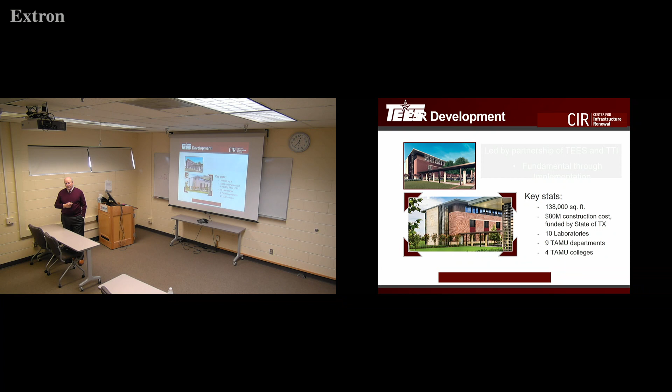I'm not showing this, but next door is the TTI Building, which has kind of changed its mode of operation since this laboratory has been built. This is under the College of Engineering, and the TTI group is now under that. So that's kind of a reversal of roles. It's really changed things a lot for people. But the items here are just ideas that we have of how we can collaborate with others. And there's several on campus that have moved into the building that we hadn't previously associated with. And so there's a lot of interesting changes happening. And I have now 3 offices.

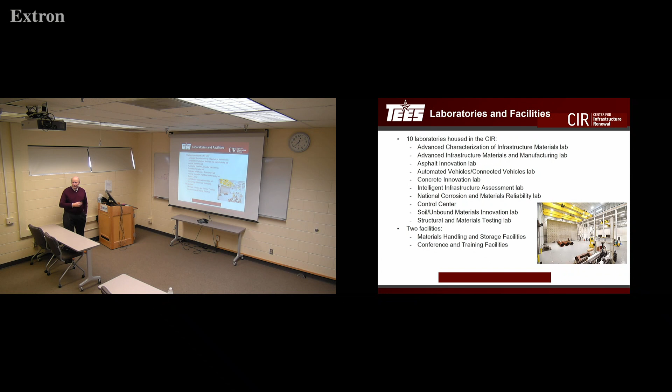And I have to visit them periodically to just see what's going on there. But anyway, yeah, a lot of exciting changes there for us in this regard. So yeah, we'd love to have you come and visit with us and talk about what the opportunities are.

For concrete pavements, concrete pavement technology has changed a lot as well. But these are generally the types that we deal with: jointed plain, continuously reinforced, and roller compacted is probably the newest one there. It's an old idea, but interestingly, it's being pushed into the urban environment for use.

And the thing that's interesting about all these types, I think, is that they all have different behavior characteristics. And I think we need to understand them. And not everybody does, especially in the general engineering community. I'm kind of a proponent that we should have a separate license for pavement engineering. I mean, how many litigation cases do you need to justify that maybe there ought to be a license for this?

That's an idea that we could probably talk about and bounce around, but it's kind of my opinion that the most sustainable version out here is actually a precast slab. You might wonder why I say that, but it has a lot of potential, and I think we're just beginning to realize some of the benefits of precast paving. But the mechanisms are different, and the way they perform ends up being different in a lot of cases.

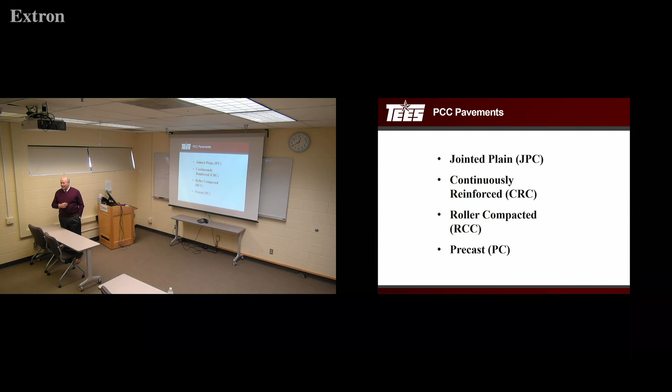And sustainability is a really important aspect here. And believe me, I'm a proponent for concrete pavements, but there are some options here that are just simply not a good choice. And I don't say that to the industry very much because they don't like to hear me say that, but I think it's true.

So what we're about is understanding how long our structures are going to last, right? This is the perennial question that's been there for years, and I don't know if we still have a good handle on it. But owners want to know, how long is it going to last? How's the new surface going to work in the climate? How's it going to behave under loads? Can we predict how long it will go? How much life? What's the cost going to be? These are very pertinent questions.

I work with a group now of pavement managers. They do truck terminals. And if you've been to a truck terminal and seen the things that go on, it's horrendous. It's phenomenal, the amount of money and the decisions they make, and I just don't think they have the tools yet. So on the academic side of things, there's a lot of work here, a lot of opportunity for us still, and it's about these characteristics.

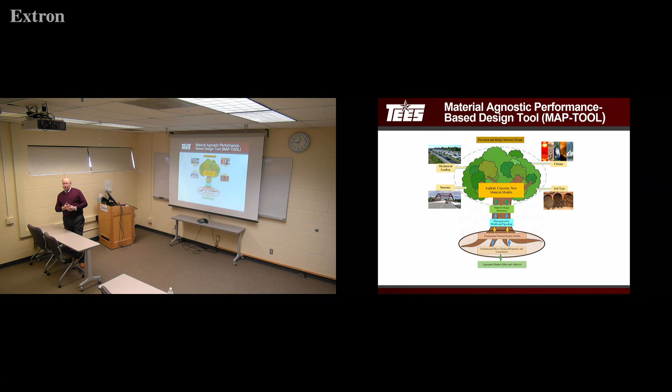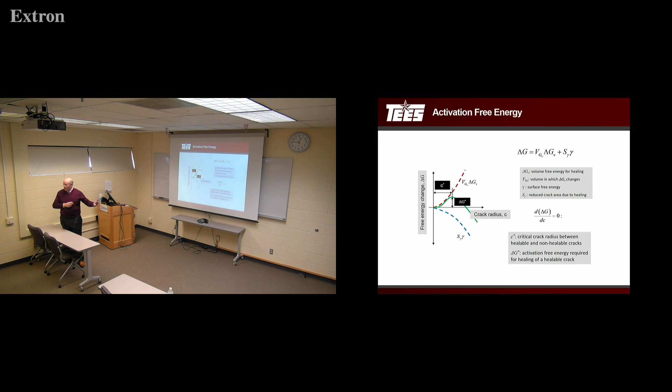This is an interesting idea, and I'll come back to it, but this is just one type of model that might work. And I'm talking about interfaces today, so I'm talking about how things bond, right? How they stick together, how they come apart. They may be different material types, they may be the same material. But this is an energy-based approach, and I'm not going to elaborate on it because I'm just kind of learning about it myself. But the idea of understanding the potential energies and the kinds of energies that are there to affect crack growth or what have you is what we think is a common ground, if you will, to try to unify the approaches that we take for looking at how pavements perform.

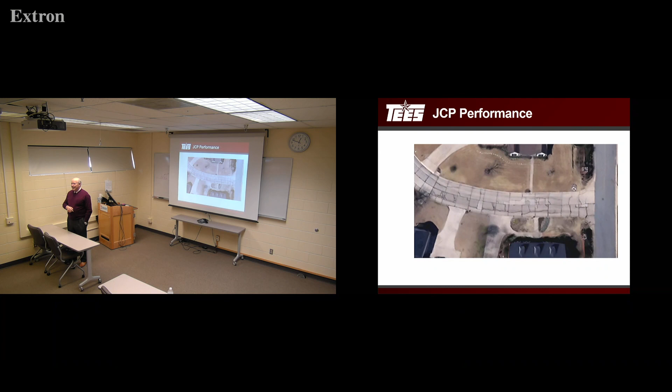So we need to up our game here a little bit. I think understanding the erosion process, and Dr. Dempsey did work on this years ago, and it's still relevant, by the way. That's another one of those things that needs to be brought out. But here it is.

Now, one thing that I've noticed is a concrete slab tends to end up unsupported around the edges and corners. It's a warping type behavior. I don't think we've realized as much as we need to how persistent this is. It's all over. It depends on what part of the country you're in, but California is notorious for this.

Now, what's interesting about this situation, the temperature cycle that we see hardly ever causes that slab to come in contact with the base, hardly ever. And it's so much that it's just a springboard. So yeah, we're gonna get pumping. We're gonna get this hydraulic effect taking place.

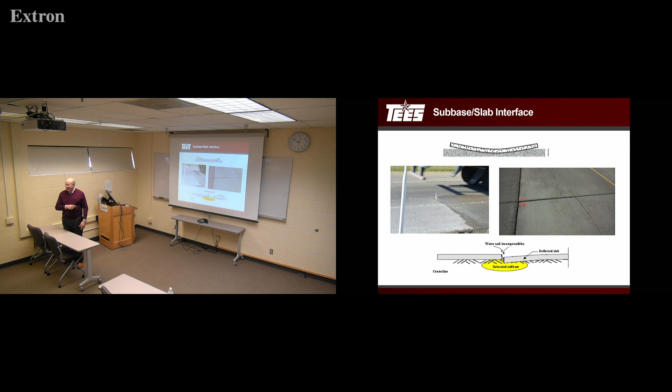Now this is why I think precast has such a great perspective about it. It's from the evidence I've seen, talking to people and asking about how these projects are doing. Even with unsealed joints, they seem to be working. It's amazing, I think, the effect this has. So how do we do it? How do we get them flat? What's the answer to that? Kind of an interesting thing.

Now, I've done some work in Texas over the years, and these are some cores that we took. And look right here, there's a nice little void, and I ran into this in my PhD work, same thing. And the interesting thing here, look, there's the slab, and there's the interface between the base and the lime-treated layer. And that's where the voiding is. This is just fascinating to me to think about what is happening.

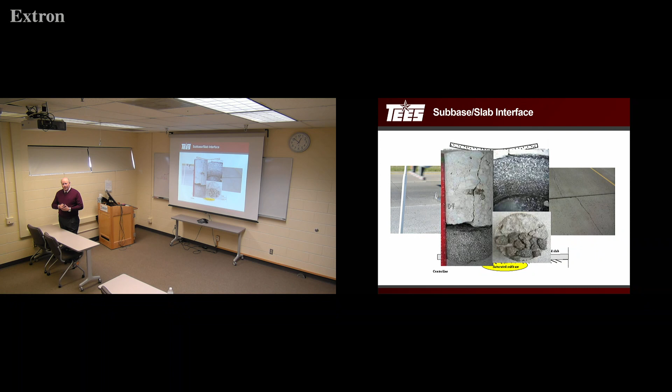But these little granules were pumped into this interface and started to wear that out too. I mean, it's a double whammy after a while. And it's a tough problem here, I think, that we're seeing. Now, again, I've been really interested in curing concrete because I think it's got everything to do with this, but I hadn't proved it per se.

So I worked with the state of Florida for the last several years. They're going to do a test road, by the way, a concrete pavement test road, on route US 301. It's north of Gainesville going to Jacksonville, on that kind of a back road up there. But I worked on the calibration. They wanted to calibrate the Pavement ME, so I was trying to work on that.

And the thing that was interesting, and I could talk forever about this, but we had 13 sites, right? We started plotting the cracking and damage relations. They're all over the place, literally all over the place. There was no consistency from one site to the next. And I'm thinking, okay, so how are we going to calibrate that? What do you use there? What's that identifying commonality? It just wasn't there.

And so I started looking deeper, and it was a little rough, but I tried to back out what I thought represented the set of the slab. And it just became evident that it was different from site to site. It wasn't the same. And Pavement ME has a thing in the program where you can change the set. It's minus 10 degrees. They tell you not to touch it. Not supposed to play with that.

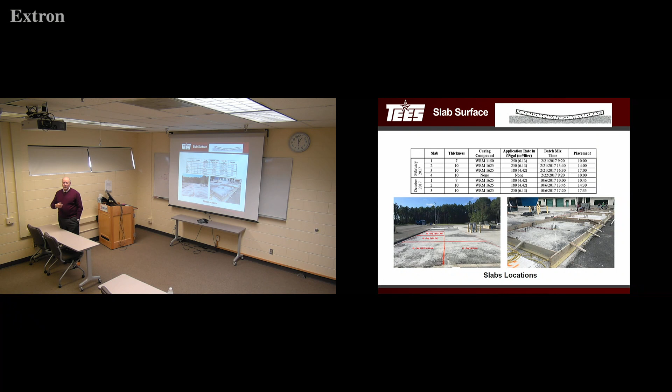And it was still lousy. But I knew how much we put down, because we weighed it, you know, and so we have an idea. But this is really critical, uniformity. And most of the time we don't have it. And if we don't have uniformity, then you don't know what you have. And the effects are enormous, as it turns out. Anyway, so one interface between the slab and the environment. That's an interface where there's more to be done.

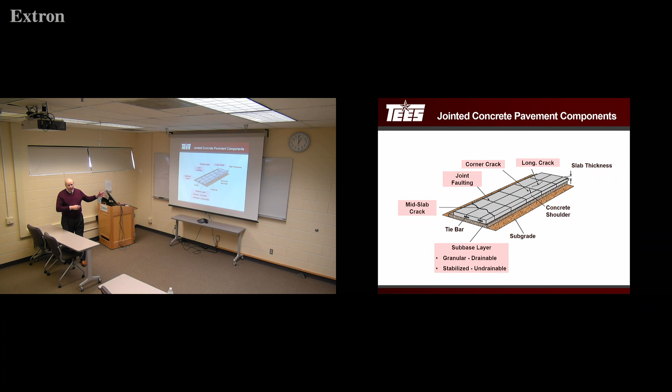Okay. Here's another one. And I mentioned this one because we have to have this done in such a way that we get enough energy to crack those things, right? Now this is a top-down crack. That's a bottom-up crack. So it's kind of odd how they're working against each other. Now, Pavement ME does top-down cracking, right? I learned about Pavement ME, and my impression is if you get a top-down crack, you shouldn't do that design. It's not a good idea. But enough said about that.

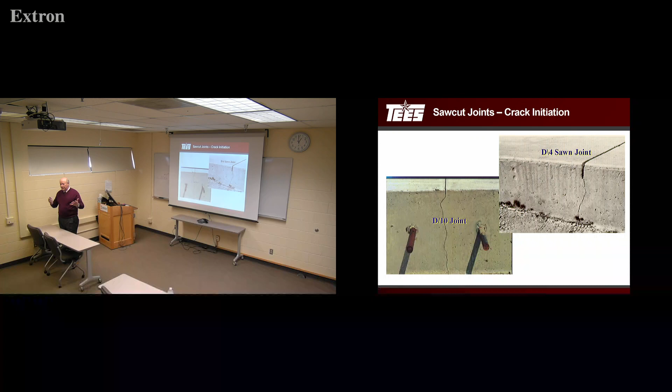But so another interface, getting enough energy to get that to break early. And if we don't, guess what happens? We get cracks other places that are wider. And we know that's not going to work either. So timing, saw cutting, that's an interface.

Here's another interesting one. When the concrete is setting, we've got hydration, drying shrinkage, moisture, thermal conductivity, thermal expansion, creep strains, strength. We got all that stuff going on. They're all interactive. What do we do in Pavement ME right now? We skip it, right? We start at 28 days, okay? So we're not even representing this yet. And wouldn't this make a difference? If we understand the history of how the hydration products form, how the porosity forms, how the drying shrinkage forms, I think this is all kind of important.

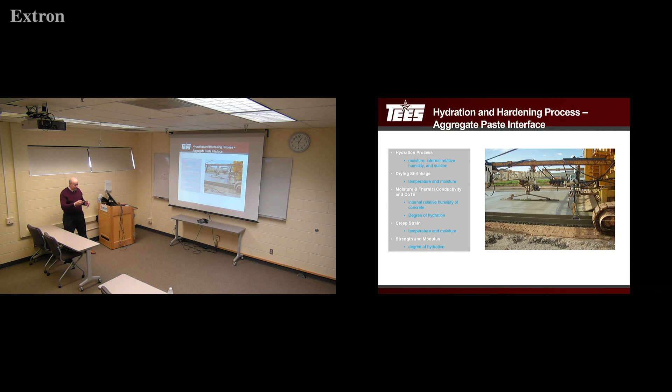And then here's another interesting interface. That's the aggregate paste bond. What do you see here?

Hydrated lime, which is a low strength hydration product. And we see inevitably, and this is gravel by the way, but we see the cracks going right there and then moving on. And so that's another, and this is why I think we see a lot of spalls in concrete. And spalls, they're unsustainable too. We can't repair them very well.

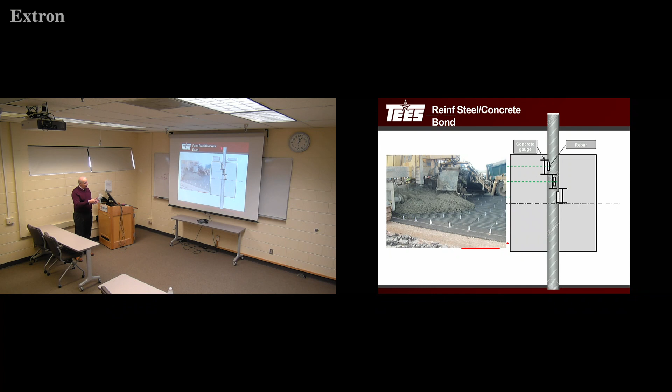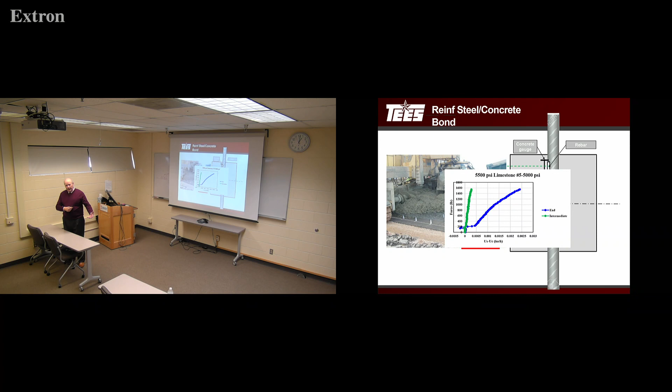And for the longest time, we've kind of thought that there's a slip anywhere through there, and I've just come to the conclusion that that just isn't the case anymore. And you can see it in these results. Look, this is towards the middle, this is out at the end. There's a big stiffness difference. And this could affect how the cracks come through.

Now, this is in Texas right now, Texas CRCP. 12 inches, single layer, very stiff base layer. I was talking to Marshall about this last night. But look, these cracks here, they go all the way through. That's a full depth crack. Goes all the way through, gets to the base, fine, right? These are not, those are cracks as well. And they're stopping in the steel, that's a problem.

And I hate to say it, but Texas has got this everywhere because they build CRCP everywhere. And they've done this for years. And now they're finding that they've turned their continuous reinforced pavement into a jointed reinforced pavement, and that's just not going to work. I don't know what the answer is going to be for them. Rehabilitation. I think I'm going to stay clear of that.

But you know, I have to commend the Beaumont district. Now they're a district in Texas that's over by the Louisiana border. And they're far enough away from Austin that I think they can do what they want. And they did. And the interesting thing is, on this project here, they took this layer out, and I was going to show you a picture and I forgot, I'm sorry. But they put an unbound layer immediately under the slab, almost 2 inches thick, and it was more or less a uniform graded crush material.

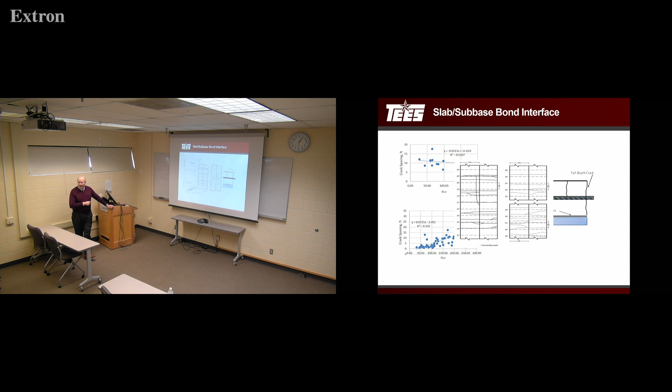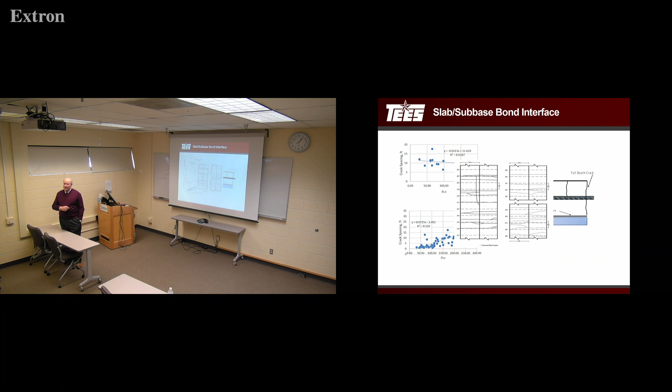And then Jeff and I, doing some work with the tollway, this is a diagram that you guys put together. I think it's quite interesting. Look at this here, these clusters. What's the reason for that? It's hard to describe it. It's hard to explain it. And yet, you know what? When we put saw cuts in here, we saw cut it, it goes away. All that goes away. So I threw this in here just to show the comparison.

Now, Pavement ME doesn't do this. I think it needs to. This is a normal distribution of cracking. Average spacing 44 inches, right? Here's the same thing for crack width. We get a distribution of crack width, crack spacing, it's distributed. If we notch it, look what happens. All the variability goes away.

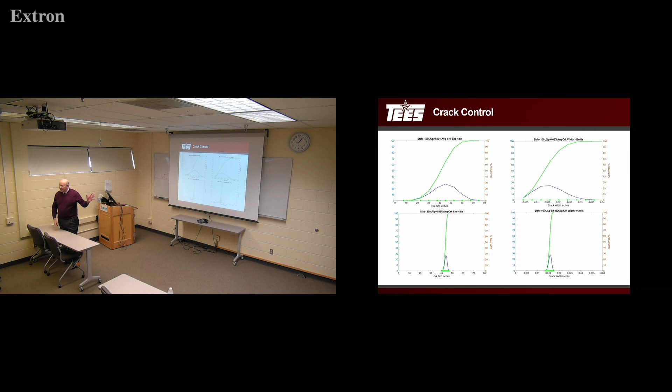Now, Marshall, we were talking last night, and I was thinking about the idea of notching, because you mentioned that, and I'm thinking, do you think we could justify the cost? That's a good question. And you tie that back into the rest of the variance in the performance prediction, I wonder. I don't know, it's just a thought. And it's just kind of interesting to contrast these things and how they may affect performance.

Here's another interface that I have done a lot of work with as well. Joint sealing. Isn't that an interesting topic? Yeah, let's see, I was supposed to animate that thing, and I apologize for that. Let me just talk about it.

But this diagram right here, it's covered up a little bit, but I took that out of the LTPP database years ago, and it was rainfall versus faulting, and it was astounding. I just was dumbfounded by the similarity. I thought, what is going on? And you've got to come to the conclusion that the joint sealing has never worked. It just flat hasn't worked. I mean, we've made the assumption that it has, but I think we've probably felt for a long time that seals are not keeping water out.

Okay. Now, why would that be? We did some test sections again out at our Riverside campus, and I had the industry come in and put it in for me because I don't do joint seals. They did the typical thing, right? Sandblasting, cleaning, air drying, did the whole thing. They put their seals in. We put hot pours in, we put silicones, we did all that.

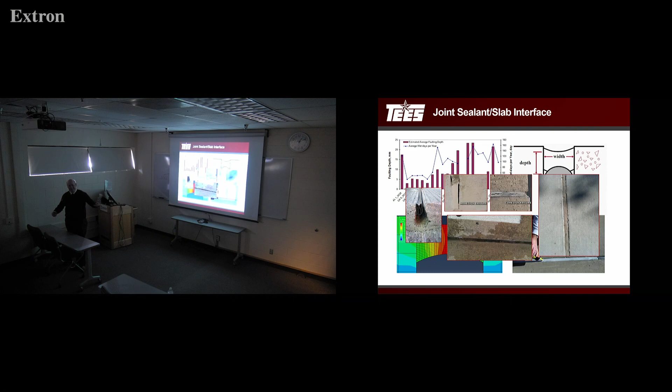Look right there. That's a bubble coming through the perfectly sealed joint, right? Right there, it's bubbling up. This was right after a rain shower and water was standing in the seal. It's just kind of interesting to think, we're getting water through. And what do you guys think? Look at this. This is the Midwest problem, which I won't get into too much, but what do you think about water that gets through a joint seal?

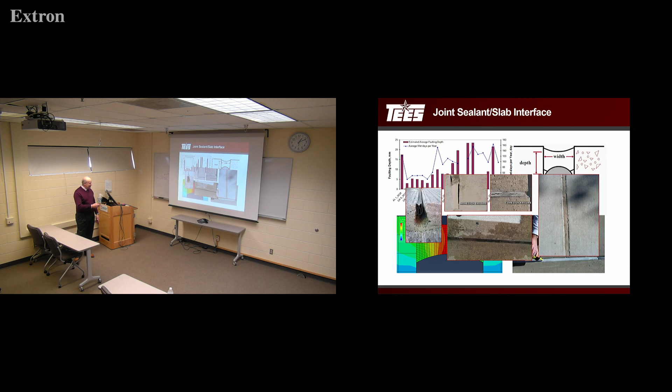Is it going to evaporate out? Is there a chance that the weather, the wind speed, all that is going to cause that water to evaporate? Probably not. And so this is really detrimental. It'd be better if we didn't seal. And some people have made the conclusion that we shouldn't be sealing. Wisconsin. And that idea is still out there, interestingly enough.

So erosion, I think, is one of the things that we've got to pay more attention to. And I've identified at least 3 factors: traffic, the erodibility, and the presence of moisture underneath the pavement. These are things that matter. So I'm interested in modeling: what are the properties here? What's the key property? What are models that we can use that use the properties? And then performance. Can we verify the performance? We've got to have a connection to really make sense of our ability to predict what the long term is going to be.

It's nice to be able to have a test that you can run in the lab that'll fit into your model, that you can come back and do field testing and verify the accuracy of it and what your predictability is. I think that is quite valuable. And I think there are some models that do that, others don't. We still need to improve on that. A good one is K-value, for foundation characterization. We can sort of measure it in the field, yes, sort of. Can't do it in the lab at all.

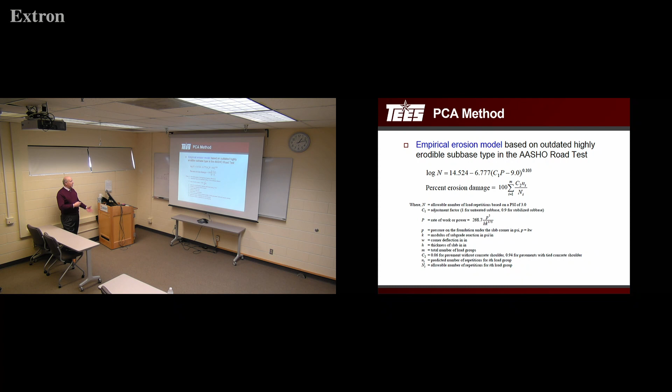But no problem, we design with it. Well, where are we today? This is the familiar PCA method for pumping. Probably still the best that we have. Now, it's not sensitive to material type, but it's got load in there, number of trucks, those things are in there. Okay, and that was done many years ago, and I'm sorry to say, I don't think Pavement ME advanced it too much.

However, I'll give them credit. They put number of wet days in it, okay? But how do they define wet days? Pavement ME says, and they're not that far off, they just say if it's annual rainfall over 1/10 of an inch, that's number of days. And looking at the LTPP database, sure, why not? Because the seals won't work anyway. So just count the rain, that'll work.

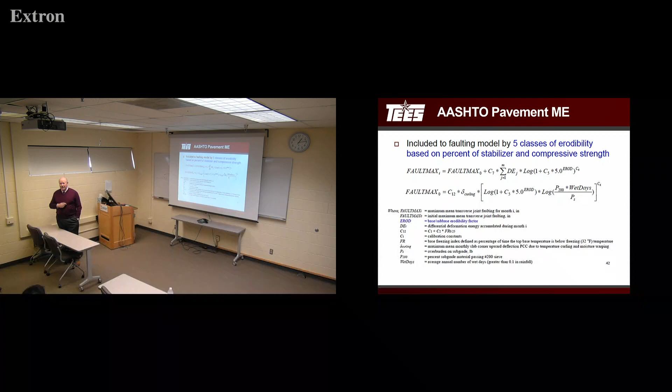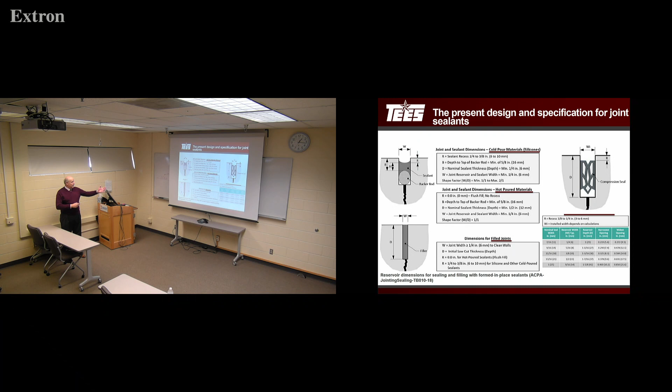But look, this is what we do today. And we're supposed to have a width and a depth on seals. Look at this. That's filling, no backer rod, okay? And, you know, this is practice today for joint seals. We're doing a little bit of work, and this is work done years ago, and we're going back and repeating some of it, but, you know, the stresses generally are in the middle of the seal, where the high ones are. And this curvature is really critical. You know what we do for noise? They fill that up. They throw away the backer rod too, because now you've increased the stress level here more than it is there. And so the stresses are oriented to bond, okay?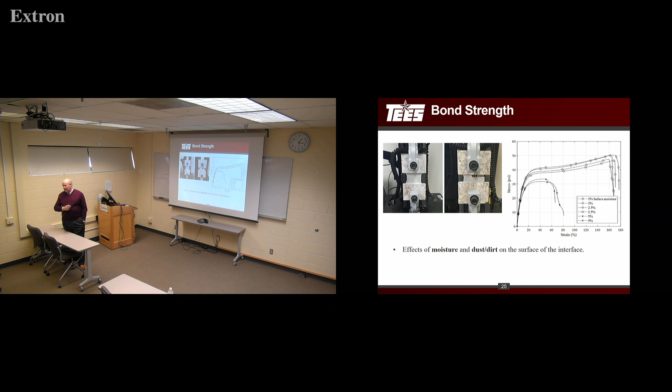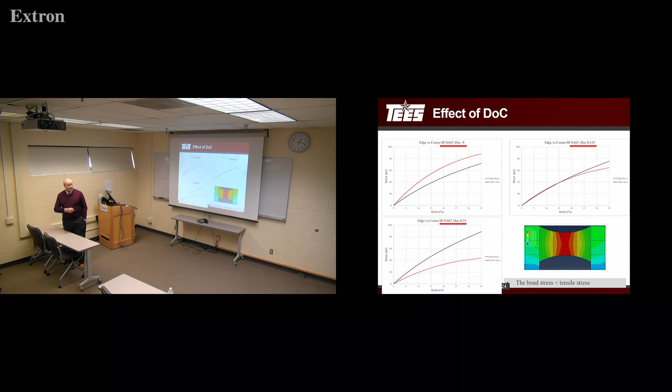Now, how much strain can we do in a silicone, for instance? What do they say? How much strain can we go? 100%? Right? Our bond tests show that you can't pull it more than 25% before it starts pulling off the edges, which is kind of interesting. The other thing that's interesting, if there's any bit of moisture on there, you can go up to a certain amount, but then the moisture starts affecting it. They don't really know how to measure the moisture. And the other thing about the bond, if this is a dirty interface, it's not going to stick. So what do we do? This is a problem, okay?

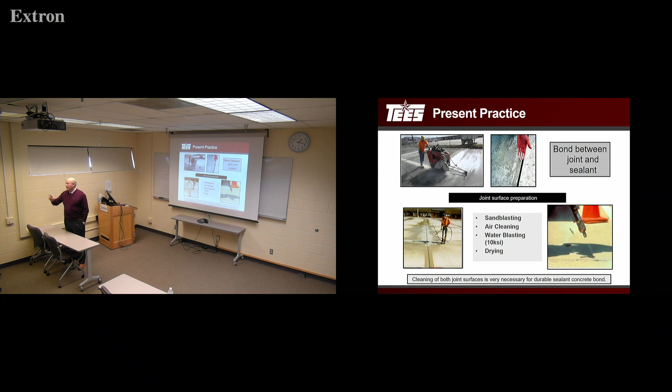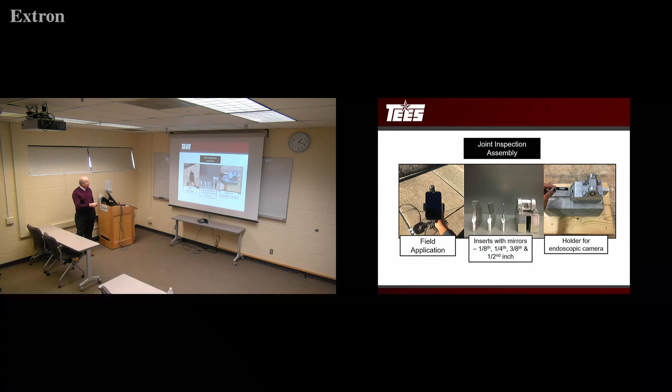Is Richa here? Yeah, Richa can tell you all about this. This is what she helped us do, is characterize the interface. And we did it with imaging. It's kind of interesting because the dirtier it is, the less undulations. And I think we can pick dirt up with this. And Richa worked with this system. We've since changed it, Richa, I'm sorry, but now we put it on wheels. Are you there?

It's on wheels. And look, this is just an iPhone. The imaging is really changing now. And there's a very good possibility we can see these under field conditions. Now, think about a clean surface, clean and dirty by the imaging, just by the imaging scale.

We can get distributions, right? Clean and dirty. We can compare those and get a type 1, type 2. Isn't that fascinating? I showed this to the industry and I think it just froze them in their seats. They don't want to know this. Okay? If I could tell them, a contractor wants type 1 error, owner wants type 2, right? That's what he's interested in. And I'm saying, look, this technology gives us the ability to characterize whether or not you're going to get bonding.

We're not done with this, but we've done some field measures and we got some comparability of clean and dirty. But I think this is something we can do. We needed a better infiltration model than drip. Drip is kind of, at least for concrete... This is a distributed infiltration. I changed it. This is mine. I use a weir orifice model to determine flow through a joint.

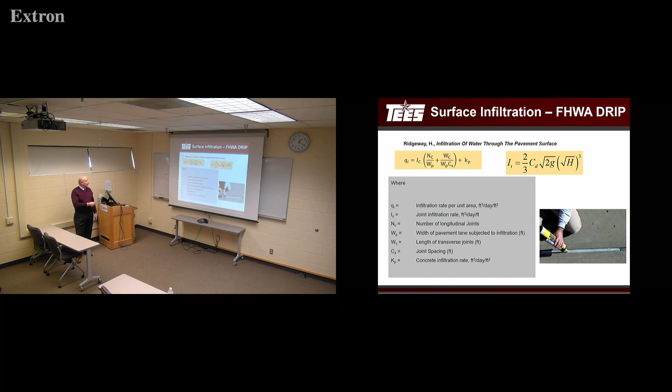So we did testing where we had to cut it away, but we widened and closed it to look at infiltration. And I just had to calibrate that coefficient right there. So we just did very simple falling head tests over the joint. You know what's interesting on a test like this? There's a lot more infiltration out there than there is in here. I wonder why that is. Just things I never really realized are going on with concrete pavements.

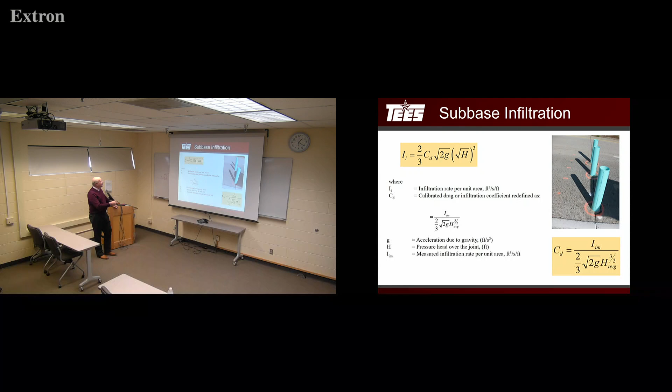So we worked out a function and we tried to keep all dimensionless units, which I think is key, to make sure units work out on these coefficients. Sometimes we forget, but we try to keep that in mind. So we use a probability prediction of the number of wet days. Inflow and outflow, what's the chance you're going to hold water in the interim? And right now with my modeling, I'm figuring more than 30 days is too much. 30 days out of the year. I wonder how often that happens. Probably not. Okay.

But let me just say something. This is my estimate of the strength right here. That's cohesive strength. That's the frictional strength. This is liftoff. I'm figuring if we lift off at the corner, we're going to lose most of the cohesion. The interesting thing I found on this strength, cohesion's everything. Once we get separation, we've lost it. And I don't know whether that's ever going to be healed. Maybe with an asphalt material you may heal it, I don't know.

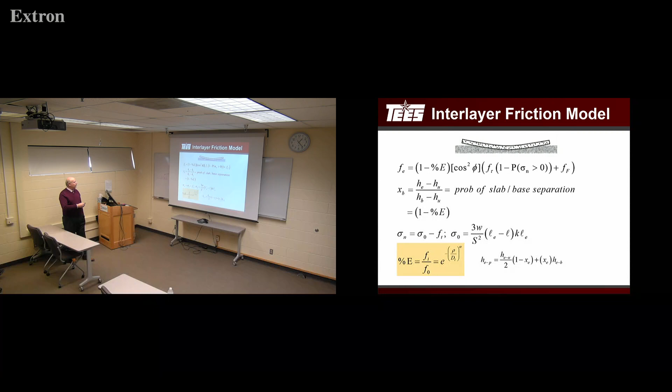This is just a Mohr circle representation of the shear strength, is all. This is very simple. You see the phi angle here. And so can we get the degree of bond? Yes, we can get that out of the FWD testing. This is on calibration, and I'm going to skip that because I'm about out of time. But here's my rework of the Hamburg device. So I'm sorry, I've now made it a concrete test, okay?

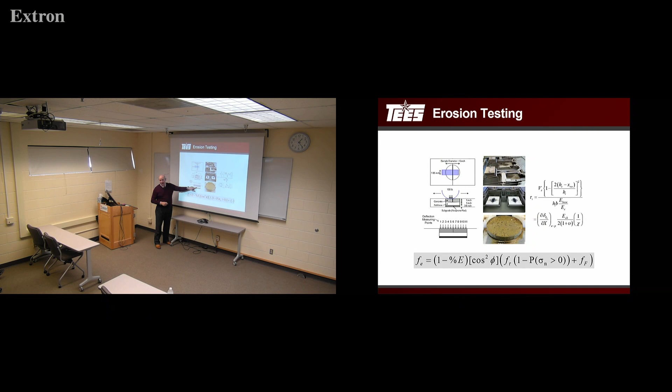But notice right here, here's my concrete cap. There's the base layer. And this thing works great. It is an awesome test. Look at the data we can get. And we can do that in 3 hours. A lot of data points. And this is an unbound material. Look right here. Look at that. An unbound layer. That's consolidation. Some type of consolidation effect.

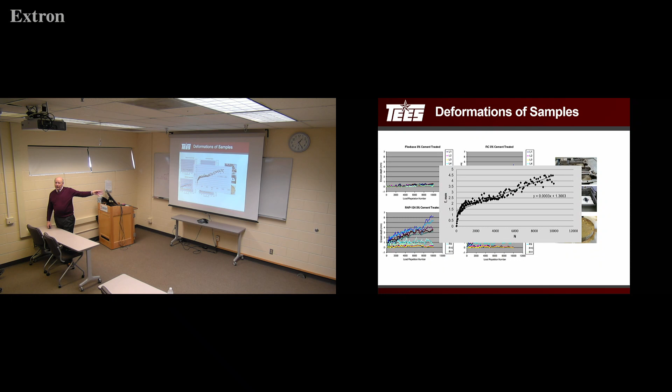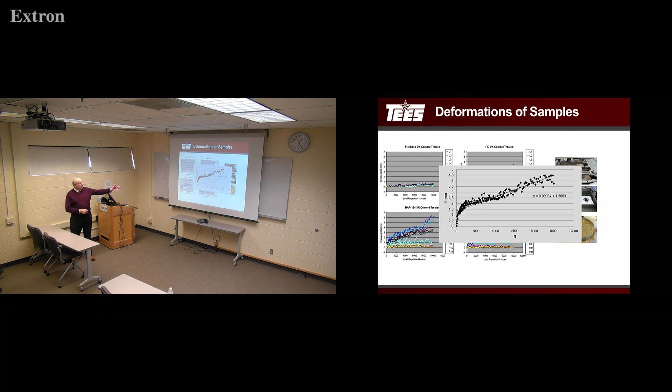And this is the wearing from the Hamburg. And look at the differences here. Most of the voiding in unbound layers, I think, is this triaxial consolidation effect. I think that's a lot of it. What can we do with gradation to minimize that? That's my question. Can we change that with texture? These are questions I have. And beyond that, it's not doing too bad for erosion. Okay? But anyway, we can calibrate to that. We can work out calibration parameters.

So the strength equation is degree of bond times the bond stress. And I'm getting both of these out of the FWD. Why can I do that? Because we got multiple positions. They all have different contact. And so it gives us a range that we can come back and fit those parameters to. It's very interesting.

Okay, very interesting. I think we can do this with FWD testing at very specific locations. I don't get a good estimate on that from the data. I'd like to, but this is really tied to the set in the slab, I think, right? So we can make a very interesting connection.

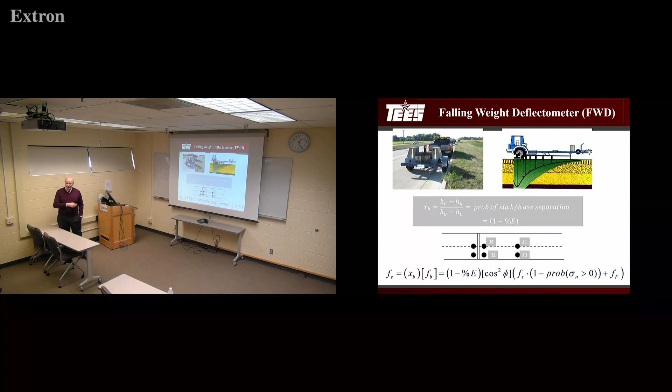And then this is the effective thicknesses. This is a little off here, but that's what the calibration is involved here, is how effective thick it is. Now the effective thickness is the single slab combination of the base and the layer. The interesting thing is the degree of bond affects that, right?

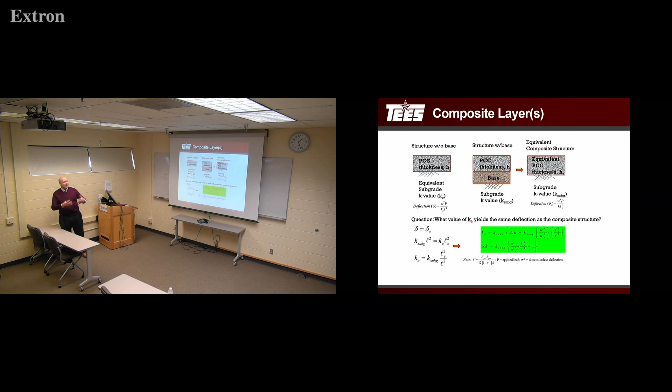So when we model it, we can reduce and diminish that interface and come in the back door to calculate what that crack is. Because your slab gets thinner, the stresses go up, and then you can calculate the crack. So in the modeling, we damage the interface, lowers the friction, reduces the thickness, and we reduce the K value.

And by the way, Pavement ME does have it backwards on the K value, unfortunately. Okay, so we don't have that problem here because it goes the other way, the way you'd expect it to go down. But we get increase in stress, increased bending, loss of load transfer. So that's the process we go through to model it.

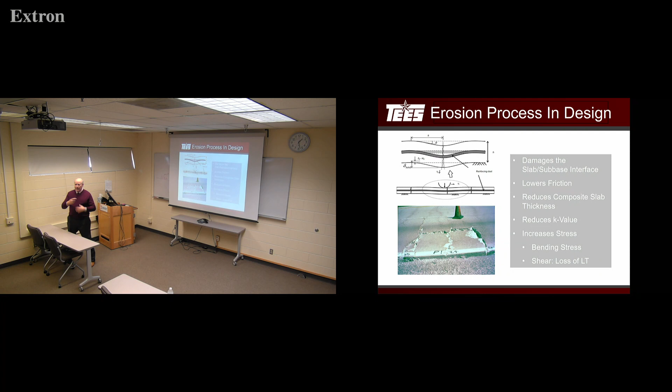And the damage curve, Barry, this is where I do the hydraulic wear. This is on this side right here. This is mechanical, so that's kind of the dormant, where you get the wear. Once you have the loose material, it just pumps like crazy, right? And so that's kind of what I'm hoping to model the damage is between mechanical wear and hydraulic pumping of it.

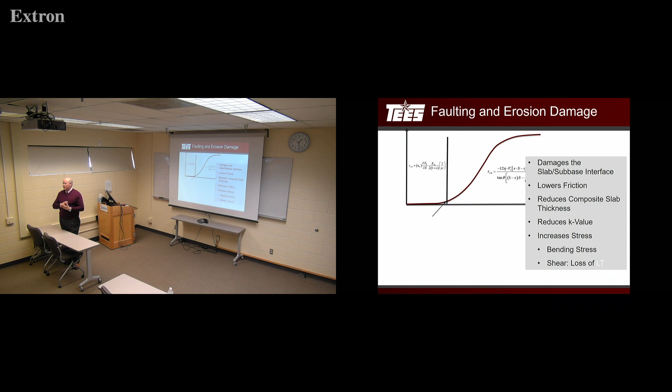This is based on velocity, viscosity, temperature. It's very interesting. I hope it works. We'll find out, I guess. But I've done some preliminary model effects, and so far it looks promising.

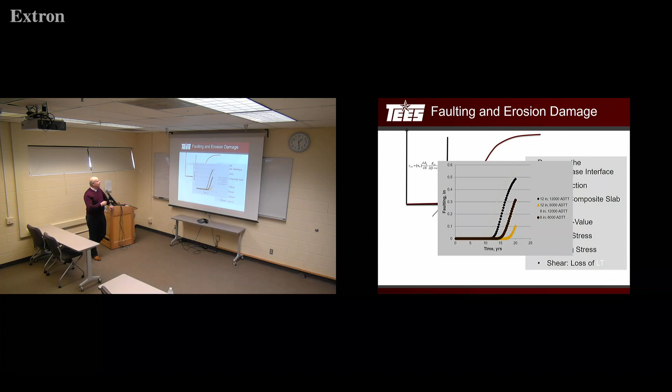Anyway, so what am I getting at? We're going to put this in a software package, and we're going to put flexible design algorithms in it too. This is going to be what we think a transparent, open source design tool for academia. We need this. We need something we can share, a basis that we can share ideas. And this is what I want to tell you about. I hope that you'll take interest in it because we want your interest.

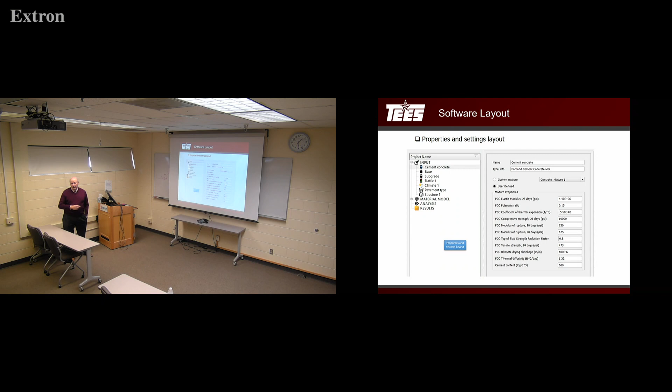We can set up input windows for inputs, and then we can do the model prediction. It's got to be simple, right? That helps. So what are the implications? This is my last slide, and I'm right on time, right, I think? So what are the implications?

Joint sealants need to seal, absolutely. I don't know if we know how to do that. I talked to the industry folks about this, the International Groovers and Grinders folks. And I was talking to them about dirty joints, and they said, yeah, probably what happens is that guy that's cleaning this side of the joint, he doesn't get the other side. So he kind of walks away from it. And yeah, it's not going to bond. But monitoring and specification of quality, that's what we need to think about.

Curing, it's only going to improve when we start adjusting it for weather conditions. Now, down in Florida, I hate to admit it, but I've been intimately involved with the test road. We're going to do a cured section, bad and good. Bad curing and good curing. And the first thing they asked me, how are you going to do that? Okay. And I said, it's easy.

We can't predict the weather, right? But we can monitor it. If the wind speed changes, if the evaporative conditions change, we can monitor that. So we set up a table of speed for the curing machine. We covered all the ranges that we expect to see based on historical data, okay?